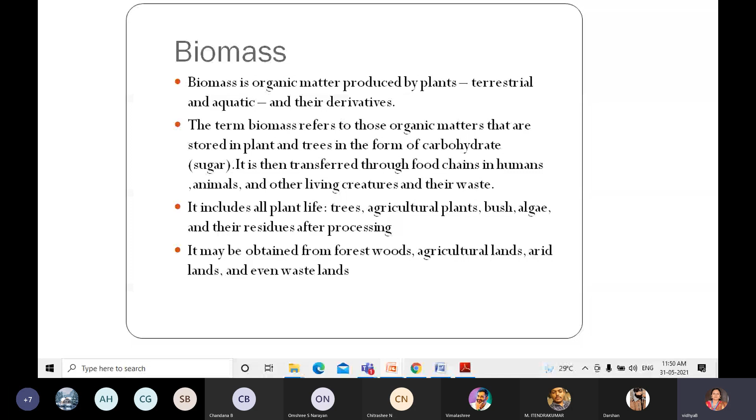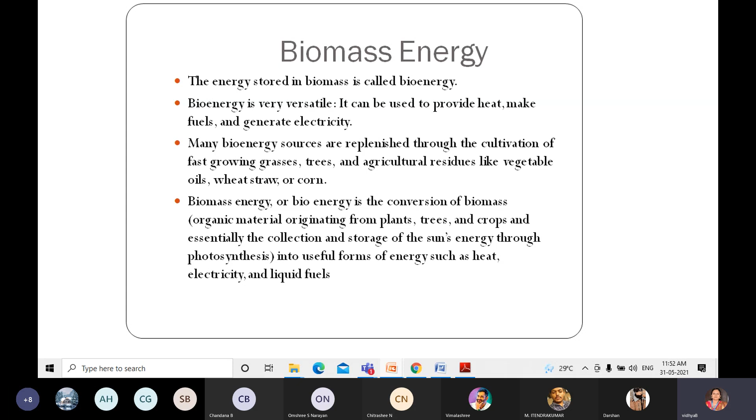Biomass energy. The energy stored in biomass is called bioenergy. Bioenergy is very versatile. It can be used to provide heat, make fuels, and generate electricity. Many bioenergy sources are replenished through the cultivation of fast-growing grasses, trees, and agricultural residues like vegetable oil, wheat straw, or corn. Biomass energy or bioenergy is the conversion of biomass, that is organic material originating from plants, trees, and crops, essentially the collection and storage of the sun's energy through the photosynthesis process, into useful forms of energy such as heat, electricity, and liquid fuels.

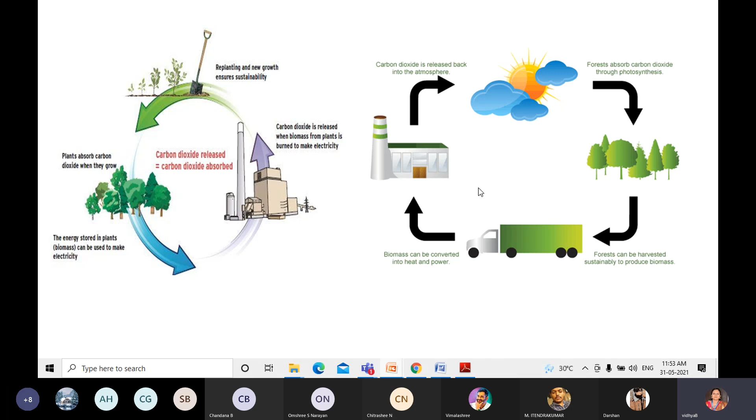Biomass production and usage. Here there are two types. Do you want to say any details about biomass? What do you know? Can anyone answer about biomass? Yes, answer please. Till now we have studied so many things. What is biomass? Can anyone answer? Biomass production and usage.

Okay, fine. In these two types, one is the direct method and the other the indirect method. In the direct method, biomass is available in the following forms: forest wood and waste, agricultural crops and residues, residential food waste, industrial waste, human and animal waste, energy crops. These biomass have a low energy density and their direct use is burning them for cooking. The problems with direct usage are energy inefficiency and excessive pollution. This requires some kind of pre-processing and conversion technology for enhancing the usefulness of biomass.

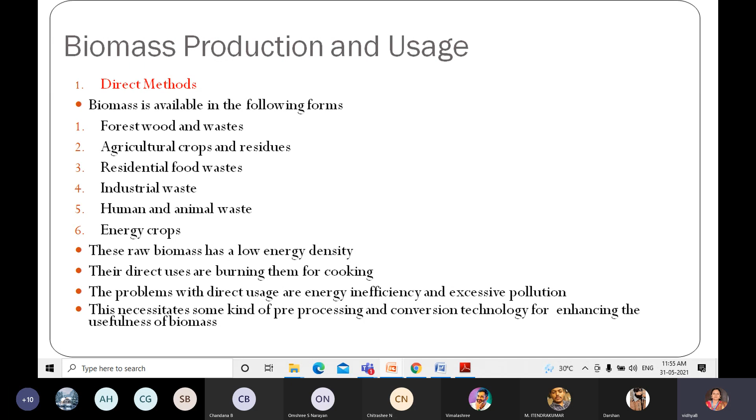They are saying it has a disadvantage, that is the problem with direct usage is energy inefficiency and excessive pollution. To avoid that we need pre-processing and conversion technology to overcome it.

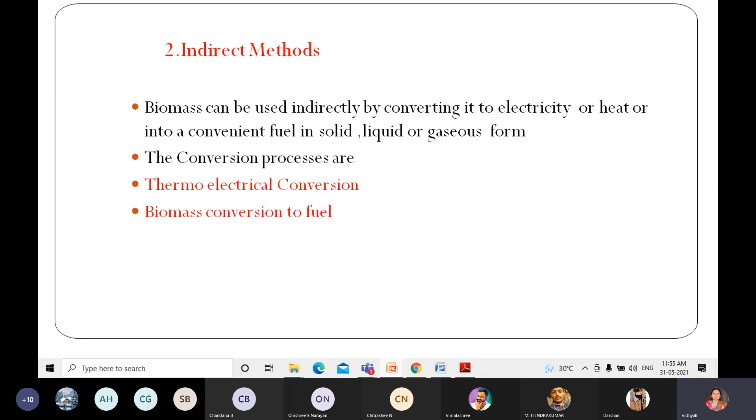Next is the indirect method. In the indirect method, biomass can be used indirectly by converting it into electricity or heat or into a convenient fuel in a solid, liquid or gaseous form. The conversion processes are thermoelectrical conversion and biomass conversion to fuel. This is direct combustion, or we can say thermoelectrical conversion.

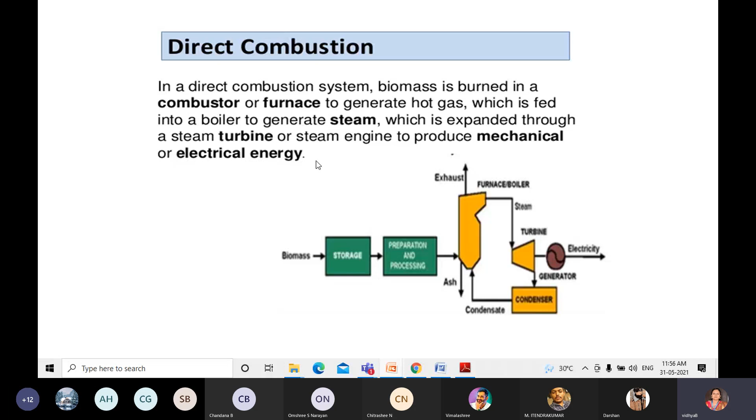You can observe in the direct combustion system, biomass is burned in a combustor or furnace to generate hot gas, which is fed into a boiler. There is biomass storage, preparation and processing, next the furnace or boiler, and the output we get is steam that goes to the turbine, and next electricity. From the boiler we get steam that is expanded through a steam turbine or steam engine. The steam turbine is used for electrical energy and the steam engine is used to produce mechanical energy.

Thermoelectrical conversion, as I've already said, direct combustion of biomass material in the boiler produces steam. That steam is used to drive a turbine coupled with a generator to produce electricity or to provide heat for residential and industrial systems. But the boiler equipment is expensive and energy recovery is low. Emissions from burning biomass are less compared to those of fossil fuels.

The efficiency of this process is influenced by biomass moisture content, combustion air distribution and amount, operating temperature and pressure, and flue gas temperature. Once again I repeat, the efficiency of this process is influenced by biomass moisture content, combustion air distribution and amount, operating temperature and pressure, and flue gas temperature.

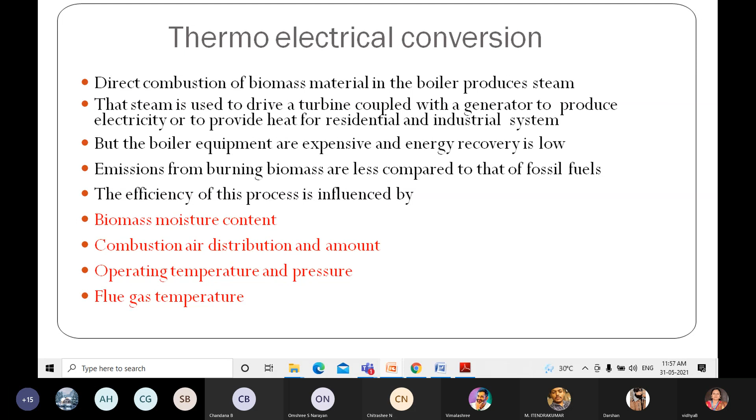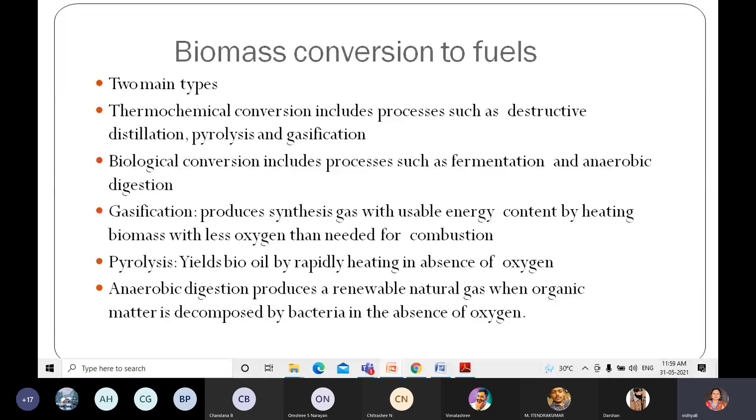Next is gasification. Gasification produces a synthesis gas with usable energy by heating biomass with less oxygen than needed for combustion. Pyrolysis yields a bio-oil by rapid heating in the absence of oxygen. Anaerobic digestion produces renewable natural gas when organic matter is decomposed by bacteria in the absence of oxygen. These are the main thermochemical and biological conversions. We already discussed them once. Go through those topics so that you'll understand in depth.

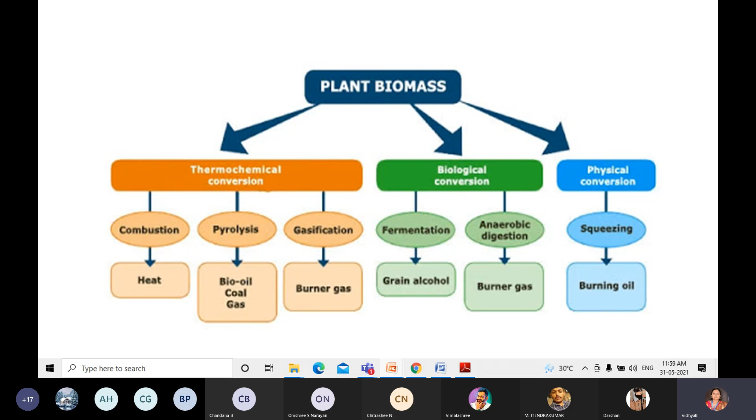For plant biomass, there is thermochemical conversion, biological conversion and physical conversion. In thermochemical conversion: combustion, with output heat; pyrolysis, with bio-oil, coal and gas; and gasification, with burner gas. In biological conversion: fermentation, with output grain alcohol, and anaerobic digestion, with burner gas. And in physical conversion, squeezing gives burning oil. These are the different types of conversion of plant biomass. In the next class we shall discuss biomass gasification.